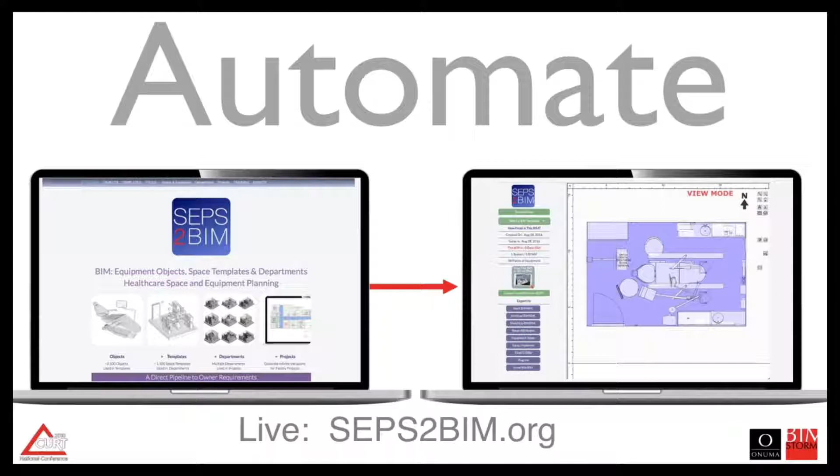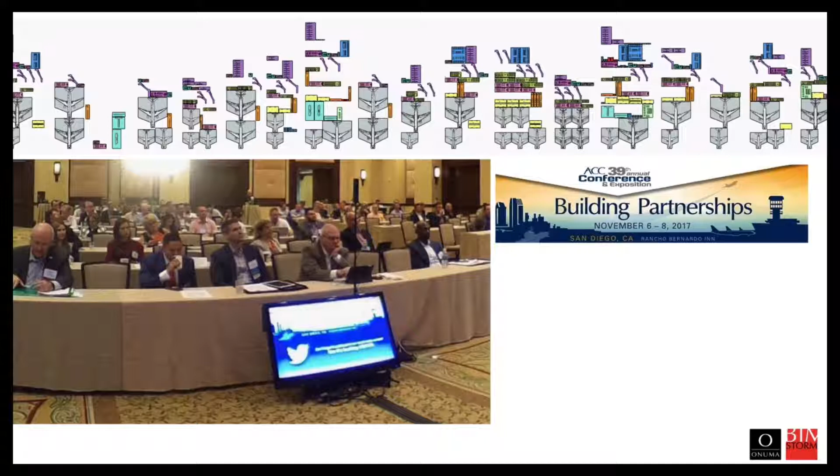So we used this platform and its architecture to ask, what would it look like if we used it for different building types? We went through a series of conferences, the first at the Building Partnerships ACC conference in San Diego, California, for the Airport Consultants Council. We had the audience submit programmatic requirements for an airport with minimal instructions. We said, imagine you're programming an airport as an owner or an airline, and you're working as architects, engineers, and consultants to resolve this design. And they submitted projects into that.

The next was at the National Academy of Sciences, at the Asset Leadership Network. Same exercise, 10 minutes. And then at the Construction Users Roundtable, we said, okay, now it's your turn. Let's see what we can do with the CURT audience. We pointed them to the Program to BIM website. We'll try this later in this webinar together, but this is the instructions we gave two weeks ago to the audience.

Within about 15 minutes, this is the results. We had 57 projects submitted from the CURT audience. Well, it looked kind of like this. It was a mixture of project types, from airports to healthcare facilities to offices, and also educational facilities.

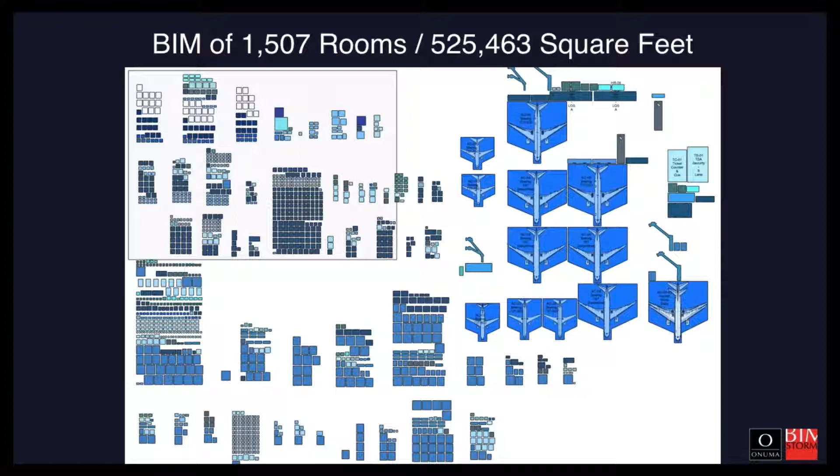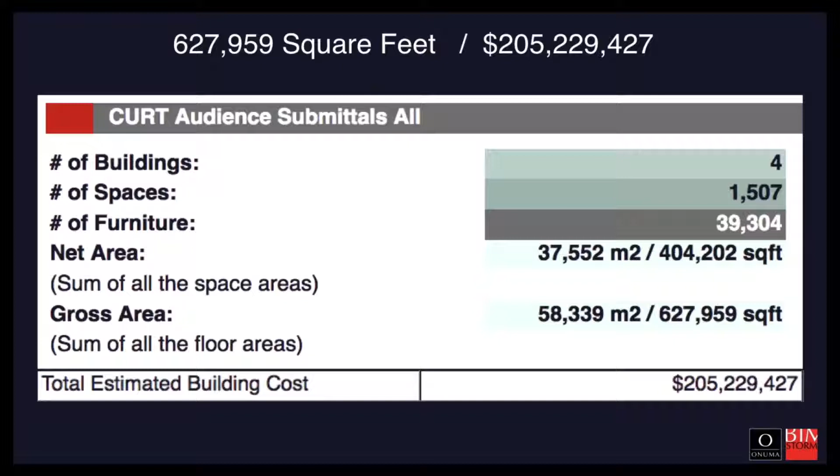So this is kind of a sampling of the submittals from the audience, unresolved requests for the projects, over 500,000 square feet. As we worked through it, we spent a few days after that analyzing and assembling what was submitted, and looking at the data as far as net square feet and gross square feet, and the 1,500 spaces with 39,000 pieces of furniture. That also generated some estimated life cycle costs based on the programmatic requirements.

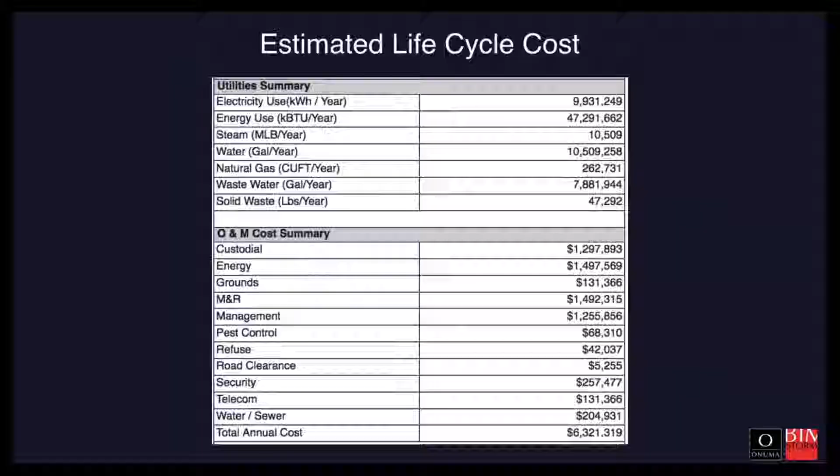So this is obviously a very early phase program in building information modeling tools, and we use that as a basis to start some studies. So this is what this webinar is about. It's going to be a short webinar. We just want to show the results and then also invite you to try this out yourself, because we're continuing on with another conference that happened yesterday, which I'll also briefly outline at the end of this webinar.

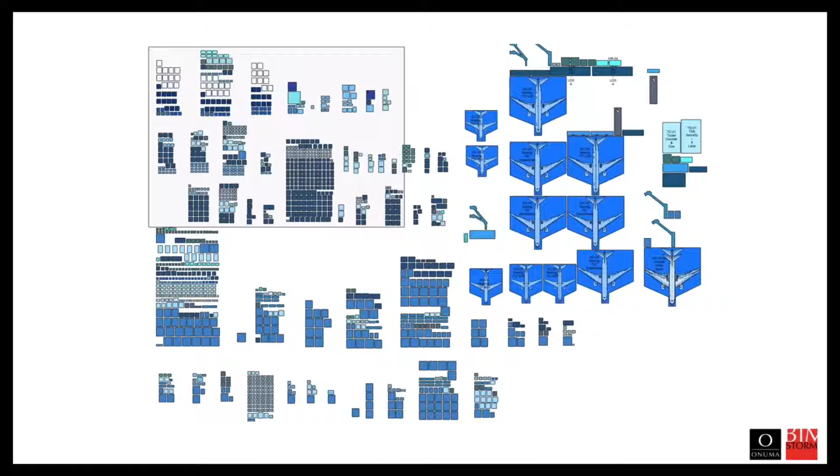So the intent is that as the programmatic requirements from an owner get adjusted, they can be automatically updated, and the objective is to have them updated in real time. So if requirements change for an office building, for example, or for an airport, those would be updated graphically and also in the report. So this is the airport program that was submitted from the audience. And this is the offices.

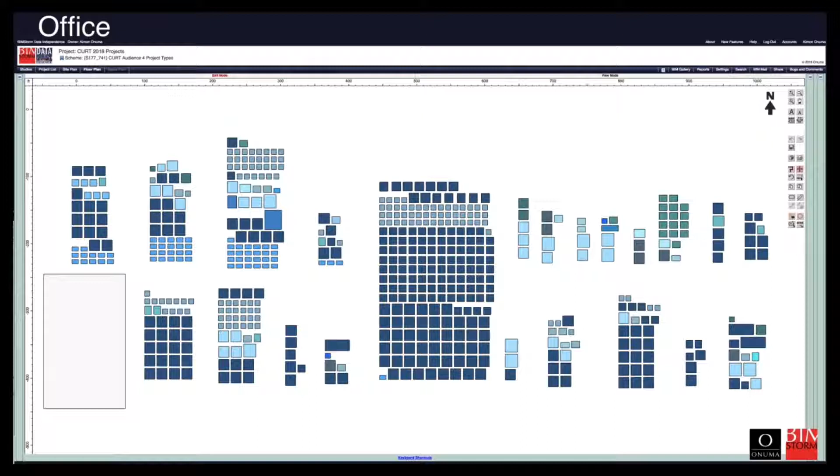Each little block there is a space with equipment in it. And the airport, the same thing, aircraft that drive the need for space, that drive the need for holding areas, hold rooms, different levels of service, and then TSA checkpoints and other support facilities, retail and support facilities for an airport gate.

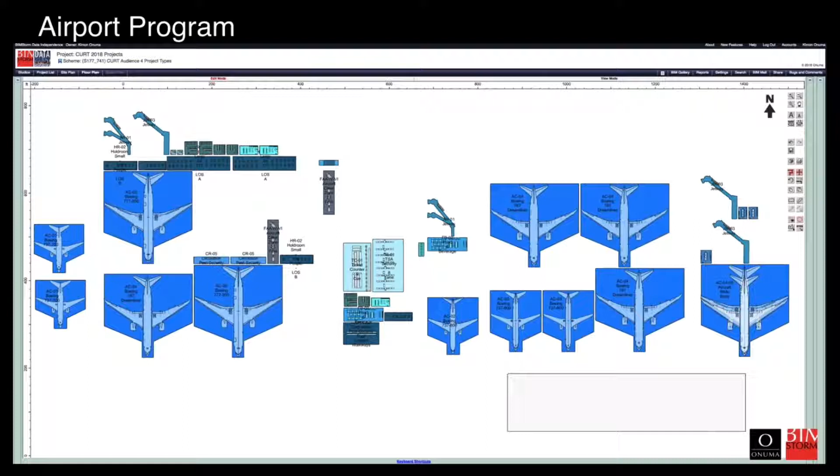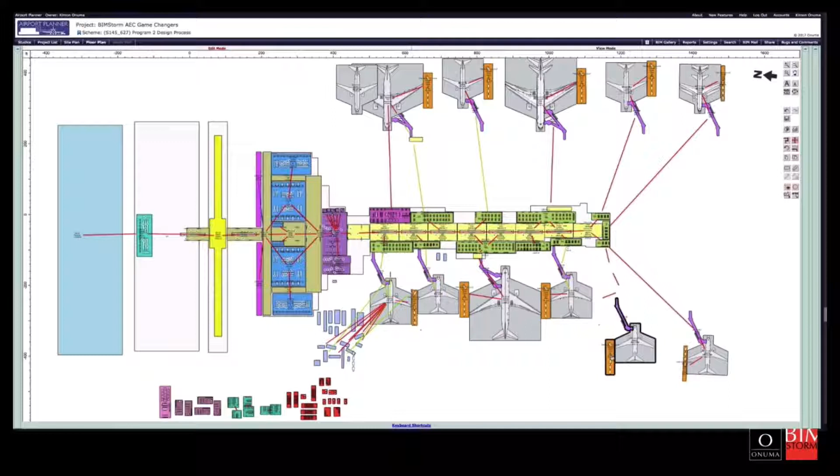We also demonstrated at the conference what would happen with this program as a next step. Designers would work with this to configure quickly a variation of the layout. This is kind of an accelerated animation of what would happen in about 20 or 30 minutes as design teams work through different iterations. It's not a final design yet, it's just to see a test fit, but with accurate data that's coming from the owner that says these are our programmatic requirements and the standards that we follow.

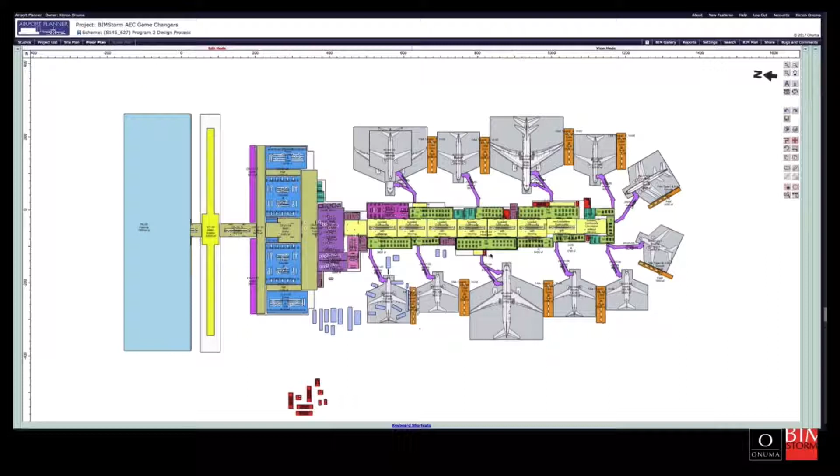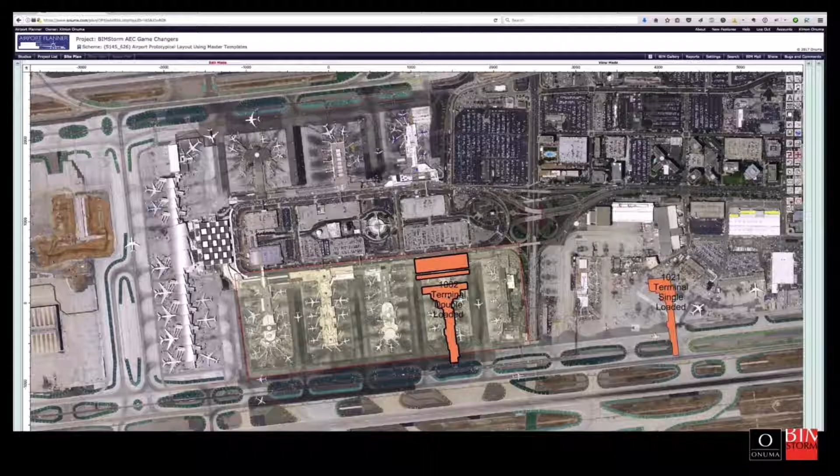For example, the wingtip clearance on the aircraft drives how much aircraft you can park at a gate, which drives how much space you can insert into the terminal to support those aircraft. And then also inserting a rapid transit line for transportation connected to the airport, and then we landed it on different site plans. So that was kind of a quick exercise based on audience input.

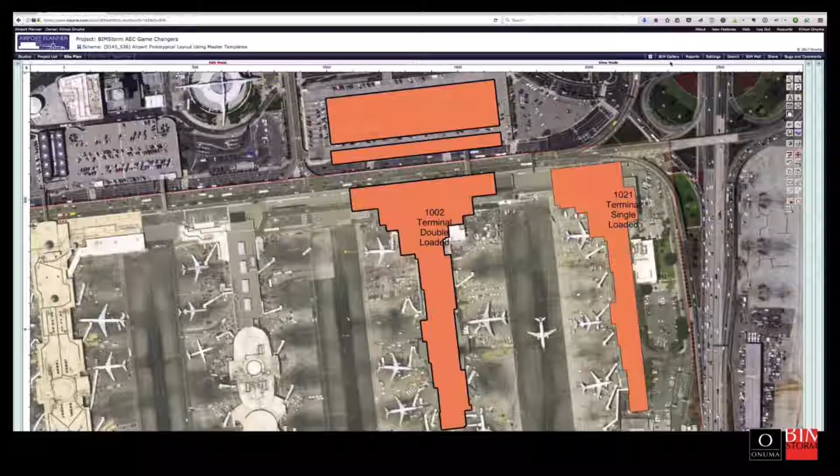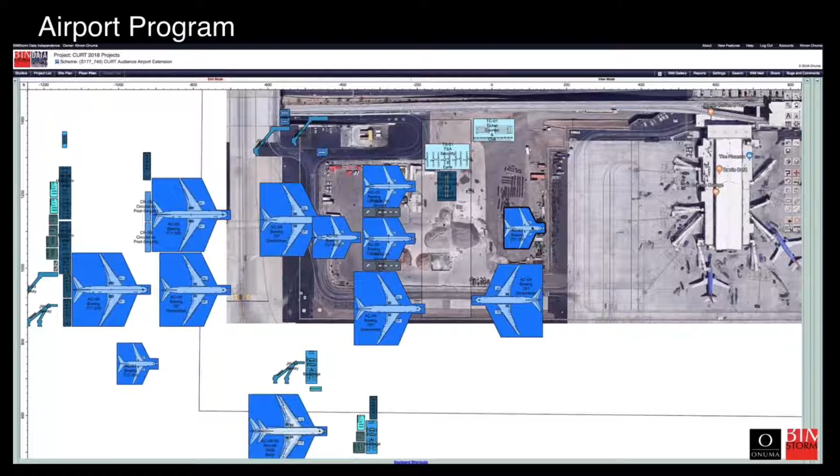This was from a previous conference. And then now we turn back to the Construction Users Roundtable conference and the airport program that came in. It was in Phoenix, so we decided to use Phoenix Airport as an exercise to see how this program would land on Phoenix.

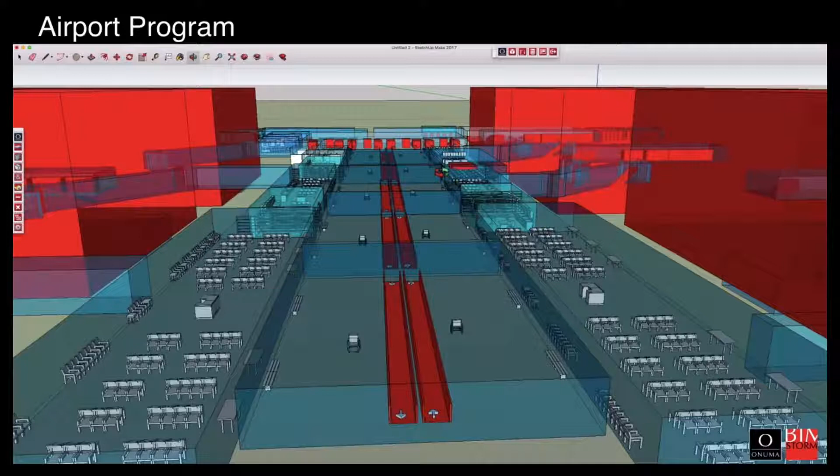And this is some of the steps that we went through to get the programmatic requirements. You can see that some areas are more resolved than others, but these are the kit of parts or the pieces that are needed for an airport terminal. And then the report from that. This same model was then exported to different formats into Revit, and this one is actually a SketchUp version of it, viewing the results of the programmatic requirements with the initial layout and initial furniture that would be part of that terminal.

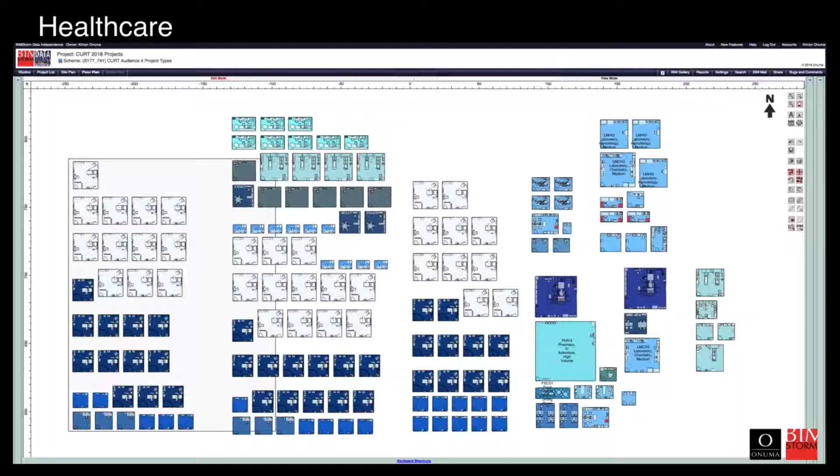We just said go to program2bim.com, look at the building type you'd be interested in, and submit. So these are the healthcare spaces that were submitted for a clinic, it looks like. We configured it and did test fits in a multi-story building, inserting those spaces - took about 5 floors to fit this program within the footprint, simulating what it would look like for a new building or a renovation of an existing one. The orange spaces are the existing circulation, and you're trying to insert programmatic space into a renovation for this building.

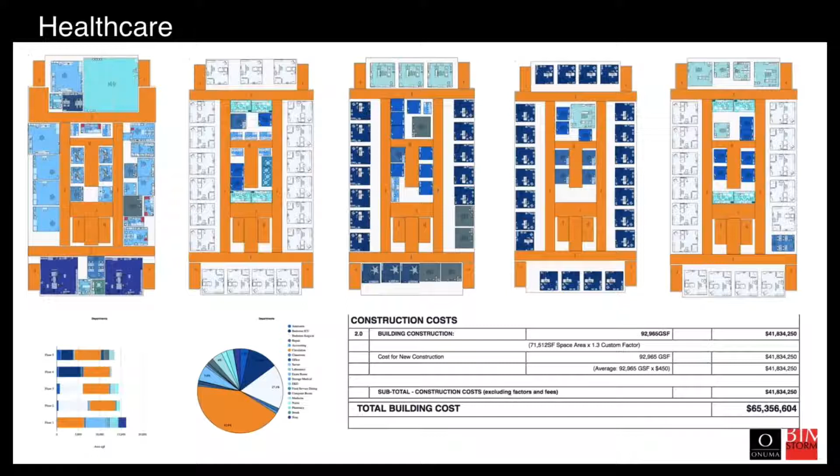And the initial estimated cost of that facility - this was very rapid iterations, and then the same design was exported into SketchUp with all the components, furniture, and equipment in the spaces as well.

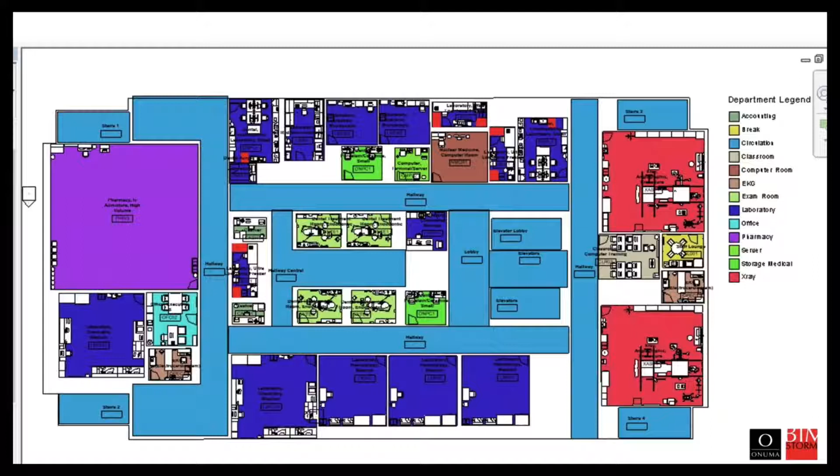And then the exact same design in Revit. So the point of this is that regardless of what tools you're using, if you're focusing on data, and the data coming from an owner, then you can start using that as a starting point for the design and construction process, and ultimately going into operations as you finish the project, ending in handover from construction to operations.

Another view of the Revit model, linked back to the data. So we actually set this up so the data on the server - in this case we're using the Onuma system server - holds the data that came from the owner requirements, and then we opened it up in Revit with an API back to the Onuma server to link to the data from the programmatic requirements.

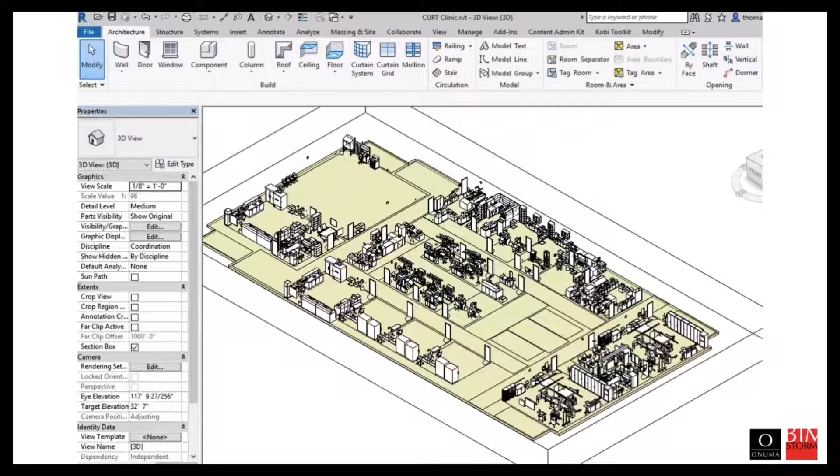So this is the 5-story view of that same building. Start to finish, the audience input was about 15 minutes at the construction users roundtable. There was close to 1 million square feet generated and then pulled apart into different building types, followed by a quick exercise in different tools - SketchUp, the Onuma system, and this one in Revit - using the exact same data to do configuration based on that programmatic requirement.

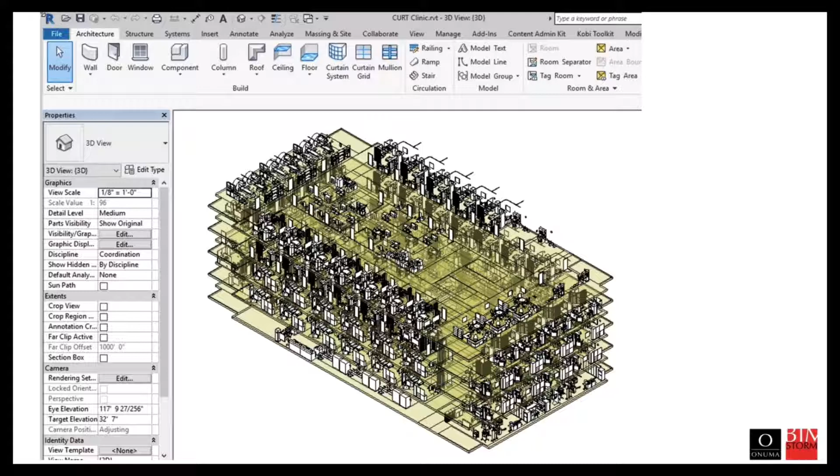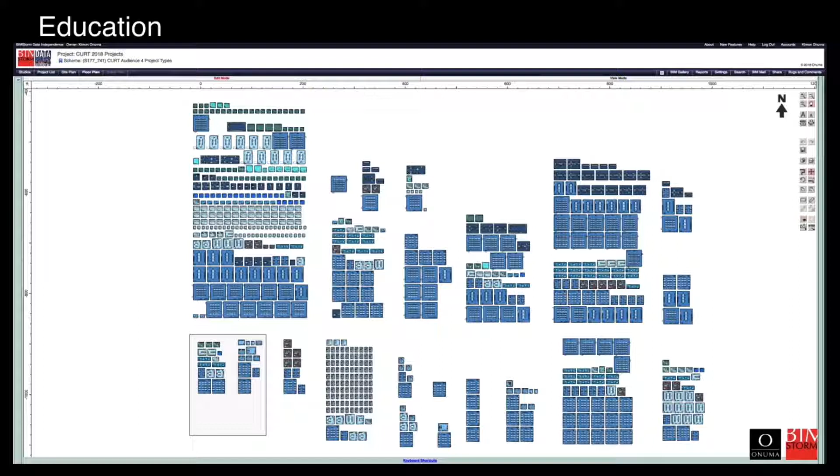Educational spaces - there was quite a bit of square footage here as well. You can see the blue boxes, the square boxes are the actual classroom spaces, support facilities, conference rooms. It was a little bit random, but it more or less looks like a large program for a high school or a community college that could be split into multiple buildings, or simulated how it would fit into a single building multi-story configuration.

So the combination of these 3 of the 4 building types - this is actually the venue where the construction users roundtable conference was, in Chandler, Arizona, and we found a nice landing spot next to the parking area to land the programmatic spaces: the clinic on the lower part of the screen, the school - the cross-shaped building - and then offices on the upper part of the screen.

The rapid configuration, some of them are more resolved than others. For example, the clinic you saw earlier in Revit was laid out based on an existing footprint and simulating a renovation. The school was started from scratch, and the office spaces were also laid out as a new building.

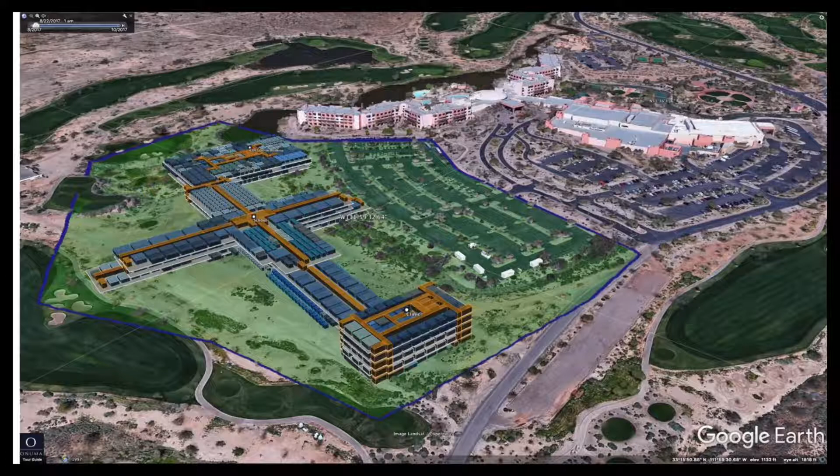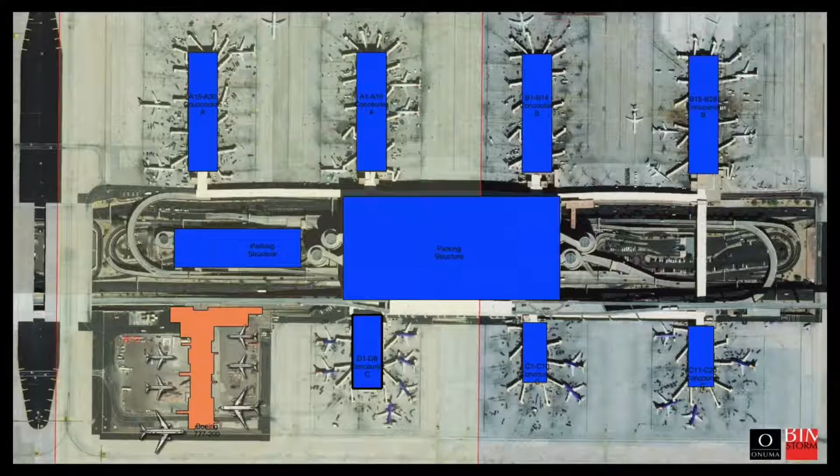And then yesterday there was another conference I attended and presented at with a group. The track was called Getting Beyond 3D, and our presentation focused on BIM platforms again for AECOO. We gave the same exercise - it was a short presentation, I only had 15 minutes, so it was more of an instruction to the audience. This was an airport consultants planning conference, so airport planners, designers, and a lot of owners and airlines were there.

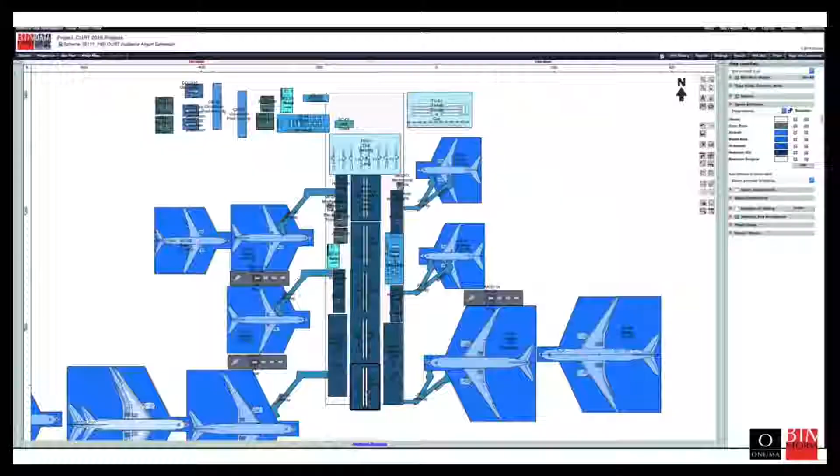This is some of the results of that layout, and we decided, since we were in Denver, we would land the requests as expansions to the Denver airport. They have Concourse A, B, and C there right now - we just randomly selected to add Concourse D and E. There's a lot of space out there, so it was easy to imagine a possible expansion in the future and consider what that would look like.

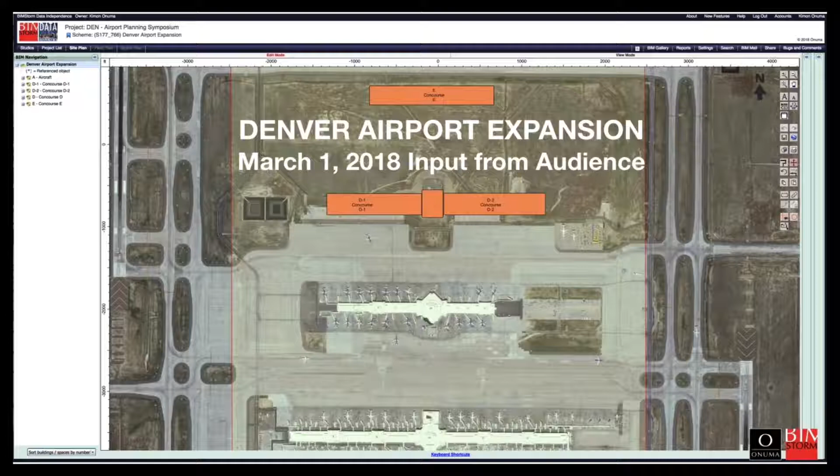So let's actually walk through this exercise together. This was what was given to the audience yesterday. If you go to BIMStorm.com, you can try this later yourself. The intent here is, over the next week, we're going to take what was submitted yesterday - we started yesterday and we'll keep accepting submittals until Monday - and present them on March 8th at another webinar, as a result of the airport planning conference, the symposium, and the audience submittal there.

So let's actually try this quickly to give you a flavor of what that looks like. If you go to BIMStorm.com...

Try this again. BIMStorm.com. And you go to the front page of BIMStorm.com. There's a big red button in the middle.

Click to build an airport, and there's two links to the webinar. Today's webinar we're going to be completing and removing, but next week's webinar the result will be right there. If you click on build an airport, it'll take you to the program to BIM page and land you directly on the transportation spaces. You can try other ones as well, but the focus yesterday was on transportation.

So imagine you're an airline or an owner trying to define the requirements. What we've done is collected the rules. This is a prototype based on the work done for VA and DoD for healthcare spaces.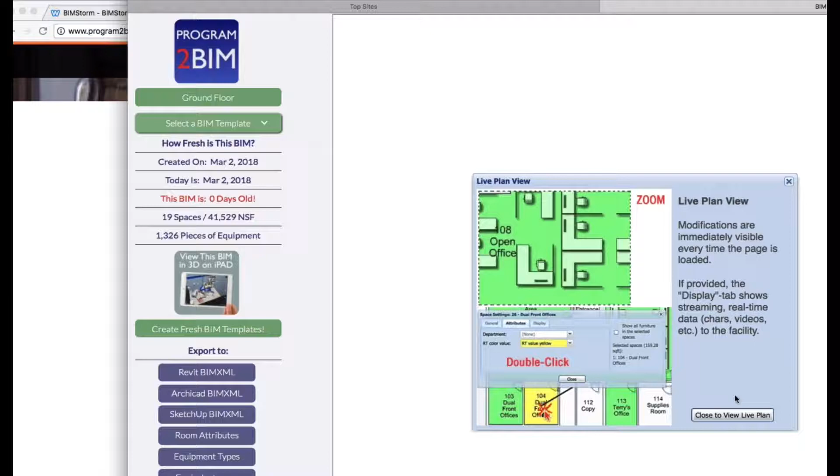And then in the initial web browser view of this, it would look like this. From here, you can export to different formats. So you could say I want to take it out to Revit, ArchiCAD, or SketchUp, or open it in Onuma and continue the work.

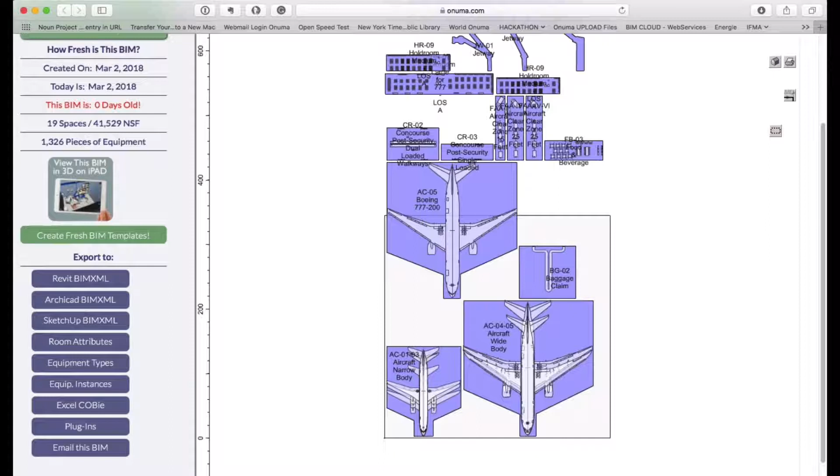So this is a configuration of the requests sent in for the aircraft and support spaces. You'll see they're just stacked, so they still need to be designed, but you can use these as a starting point. That was the exercise we gave to the audience yesterday, and we're going to be using these over the next few days to continue filling in the Denver airport layout.

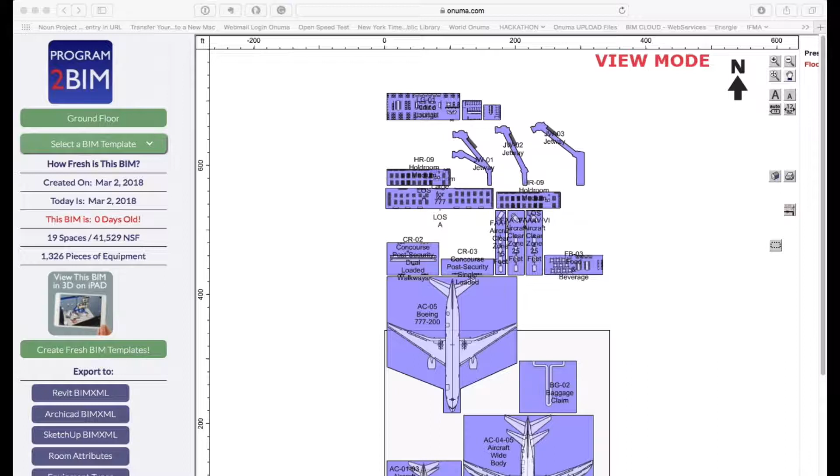This is Kimon Onuma, and if any of you are interested as owners, architects, or other consultants in applying this process to your project type - this is obviously focused on airports, and we showed healthcare and other project types - but it can be adjusted to any building type. We've been getting requests from other owners that want this process applied to their building types.